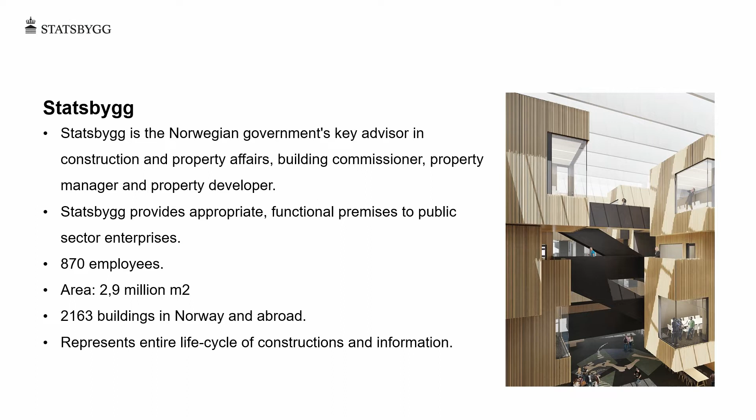Statsbygg is a governmental body. We are quite a large organization with above 800 people, and we are managing more than 2,000 buildings. We provide workspaces for other governmental bodies, especially buildings that are not usually available in the commercial market, unlike office spaces. So it's police stations, opera buildings, embassies, and so on. We are representing the entire life cycle, both of constructions and also the information about constructions, and that is, of course, the focus of my presentation here.

I myself, I'm an architect, but I've specialized in information management and digital information management. I'm the leader of Statsbygg's BIM group. I'm also project manager of what we call SIMBA, which is our BIM requirements and implementing those in projects and building operation. I'm also convener of a Norwegian standardization committee for the series of BIM standards. Recently, I've also been a task group leader in the CEN task group for developing guidance on how to bind BIM requirements to contracts according to ISO 19650. Earlier on, some years back, I was the managing director of buildingSMART Norway.

So the business case for using BIM for us, and I would like to start with showing you what a BIM is for those of you who may not be acquainted with the term. A BIM is an object model, it's a process using models like you're seeing on the screen, and those models consist of objects that are machine interpretable. Machines understand what they are, and you can also attach information like you see here, naming and properties to, for example, this wall that is highlighted with the green color here. So basically, we are modeling buildings before we build them and are able to do a lot of analysis and so forth.

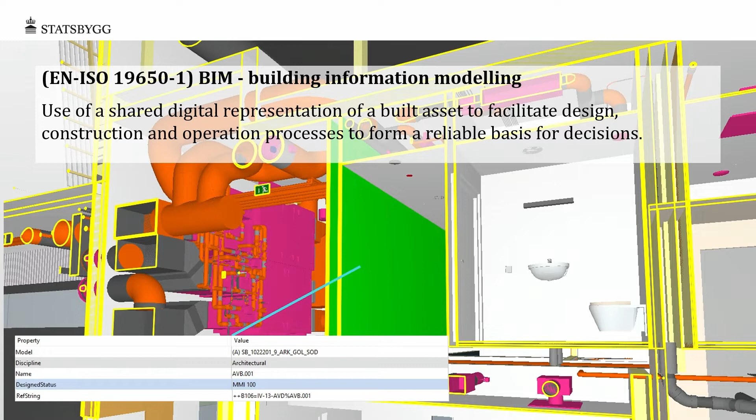Some of the gains that we see in our uses, and those are just four out of many examples, is that it improves the quality of the decision process. We, as a client organization, have a better overview of the consequences of our decisions. We're using it for example for estimating cost, life cycle assessment and calculation, calculating greenhouse gas emissions, and so on. So we can do it on a pretty precise level.

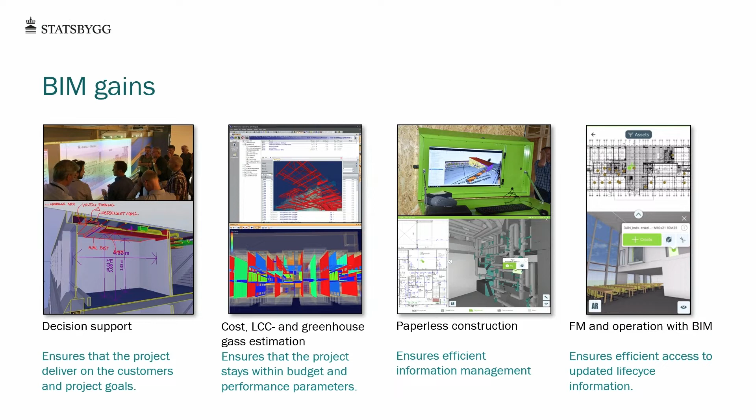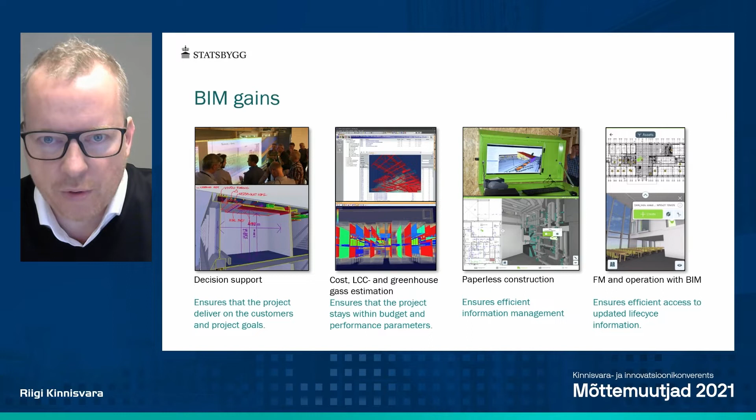And the strength about using models is that, for example, quantities and control of types and object systems is managed very well. It also gives us a benefit to make it possible to streamline information management to, for example, the construction site. So the construction site always has updated information, and they have a better understanding of what they are about to do and build. And of course, we have plans, and actually we are implementing systems now to use BIM also in building operation and facility management as well.

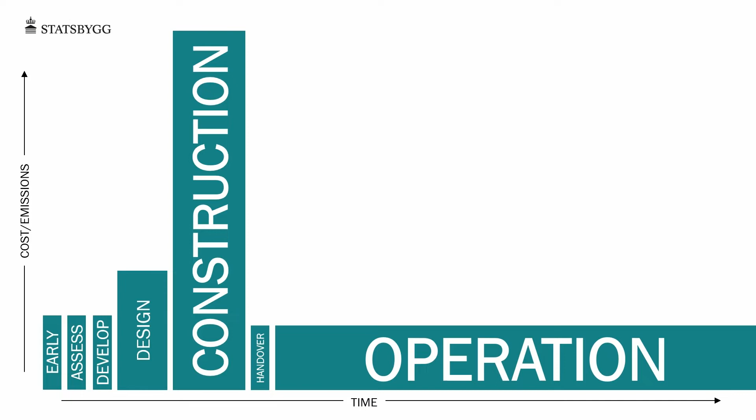And in order to achieve those benefits, we need to digitize those processes that have the highest turnover of cost and emissions, and those are construction and operation. We have been using and requiring BIM for quite some years in Statsbygg, but it's very much focused on design. That's quite natural because it is in the design stage that you are creating the information that you are using in the construction and operation. But now we need to move that information into the construction. A lot of contractors have actually done a lot of work here and are starting to be very digital, but we as a client have to make sure that information is much more standardized.

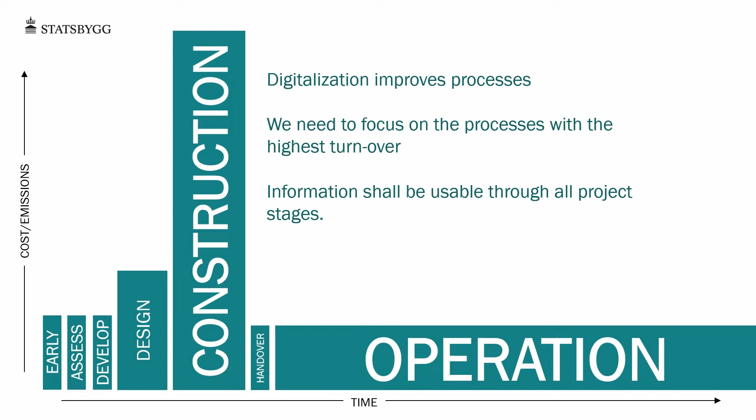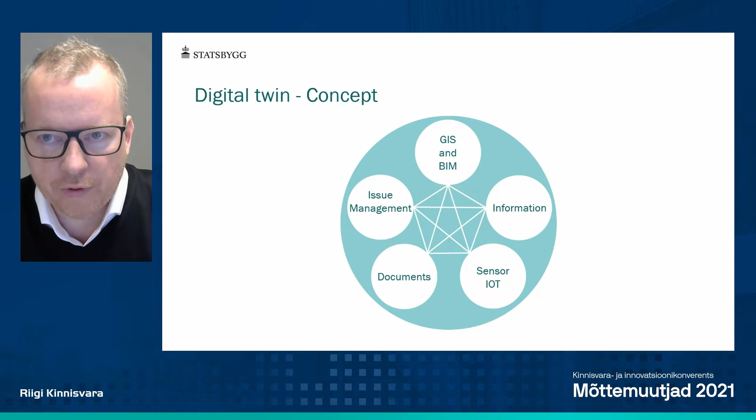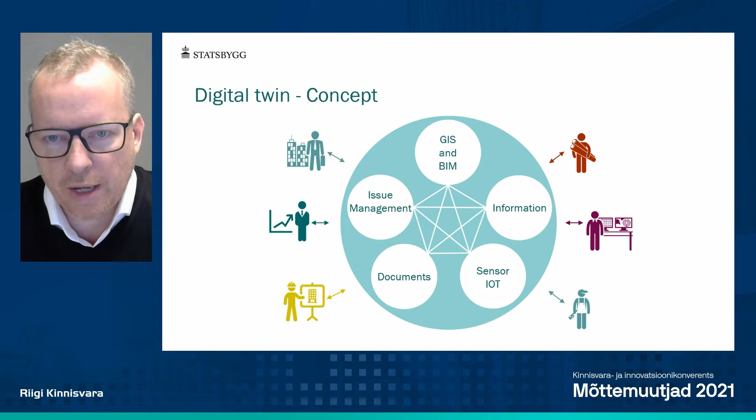So information from design and construction can be used in a standardized way during operation, because we need to be able to operate our constructions across all projects, so it has a uniform information structure. That is especially important when you look at the concept of the digital twin. You're probably familiar with that term, and in our approach to the digital twin concept for building operation, it means that people operating and facilitating the constructions have to be able to utilize information such as BIM, but without being BIM experts. They have to be able to reach out and get the information they need from their own applications. So we need to link a lot of applications together, and in order to do that, we need to be standardized.

We have also had some reports pointing in that direction. Those are actually quite conservative estimates, that we have the potential to save 7.5 million annually just in Statsbygg on building operation, through to increased innovation, improved quality, and also cost efficiency by being more digital. So those are the business cases and why we're doing this.

So we have some strategic goals that we are going to achieve in the future. Now, a little bit about SIMBA, what we call a solution to our challenges. And what are our challenges? When we look back from when we started to require modeling in all our projects in 2011, until what we have received in 2018, we saw that actually only a third of all the projects that were required to deliver models delivered something, one model or more.

And it was actually just less than 10% who had delivered all models for our archiving and use in building operation from all the 4 domains that we required. And none of them were according to our information standards. So this is a problem for us. We cannot really use all those models in building operation without a lot of alteration and checking and clearing. And it's a lot of cost.

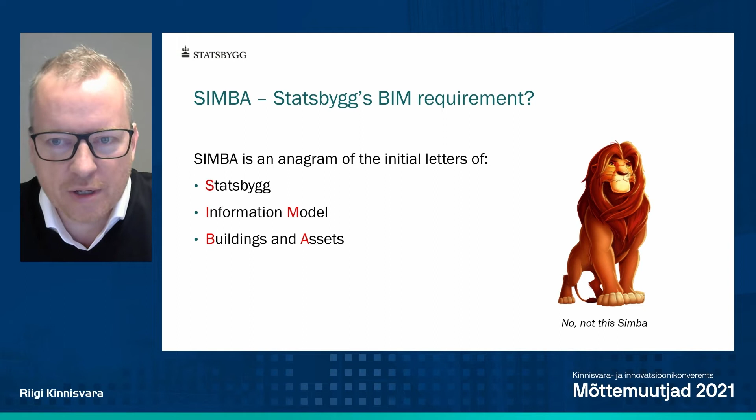And that is actually what SIMBA is, and SIMBA is not the fellow on the right. It's not a Disney character in this case. It's an acronym of Statsbygg information modeling, building and asset. And SIMBA is, most of all, an information standard. That means that information shall be able to be used across all project stages and all projects. And it should create predictability in the industry, so whoever is providing information for us knows what is expected from them.

Then it's also a standardized BIM requirement set based on the information standard. And since it's standardized between the projects, it means that we also have central learning in the organization based on the experiences of how it has worked in the projects. Then it's the automatic model checking. I'm going to show you a brief example of that.

And then, of course, and I'm going to speak about that at the end of the presentation, it's all based on open standards. It's very important for us that we have a robust solution that will stand over time. So we try to be as harmonized as possible with other Norwegian and also international clients and owners, and all based on open standards that we have an impact on ourselves.

So a little bit about how the SIMBA tools can improve information quality. This is about the process, so you understand how we're working with SIMBA in a project. We have the SIMBA Statsbygg requirements in a database. And when we establish a project, we make a copy of that database. The database is provided by a German company called AEC3, and then it will be project specific. And you can export a report that is human readable in PDF.

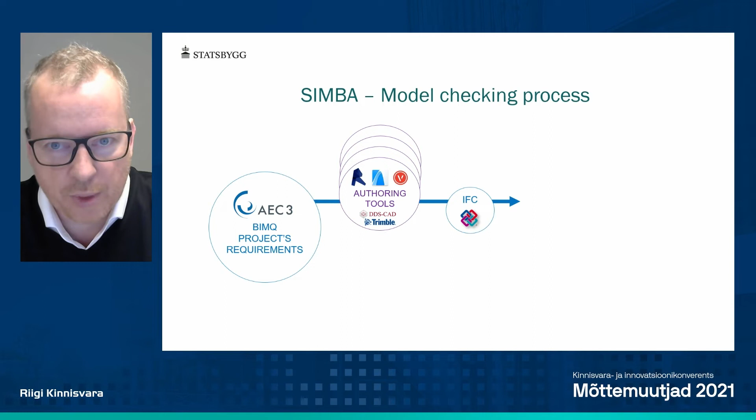So the architects and engineers know what is required from them, and can develop their models and their design in their proprietary software and export an IFC file. And what is special about this requirement database is it also exports something we call an MVD XML file, which is in the buildingSMART family of standards. The normal user doesn't really have to think about all these formats. It's just a file type that describes the requirement.

And then we have, together with DataCubist in Finland, developed a user interface in SimpleBIM, and likewise with a Norwegian company called NTI, a solution called Pillr, where we have developed an MVD XML interface. You can read the IFC file and check it according to the MVD XML requirements. And all deviations that are found can be reported back using the open standard BIM Collaboration Format directly into the authoring tools of the architects and engineers.

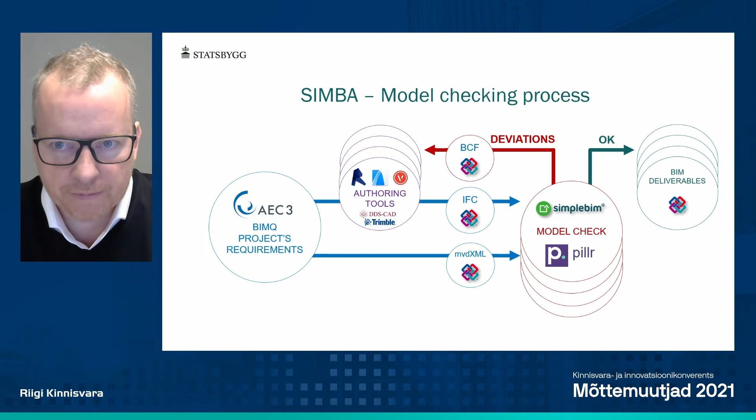And with a bit of training, the point is that the architects and engineers should run this process by themselves. So we as a client should just receive accepted and correct BIM deliverables. And this is just an example of how it is done. You start with loading in your IFC file, then you open the MVD XML plugin.

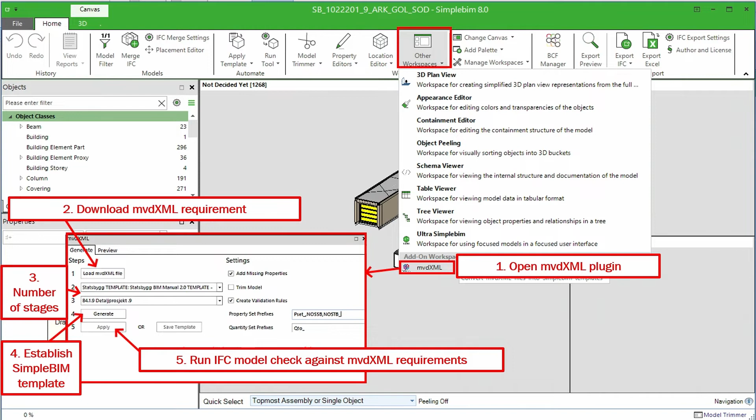It's available for everyone who has a SimpleBIM license. There's a bit of setup where you download the right MVD XML requirement. If you have more than one stage in the requirement, you say which one it is, and then you just run the requirement, and you get an overview of all the deviations, and also everything that is correct. The upper is the overview on object classes, and the lower is a more detailed report on property level. So it can really give very good insight.

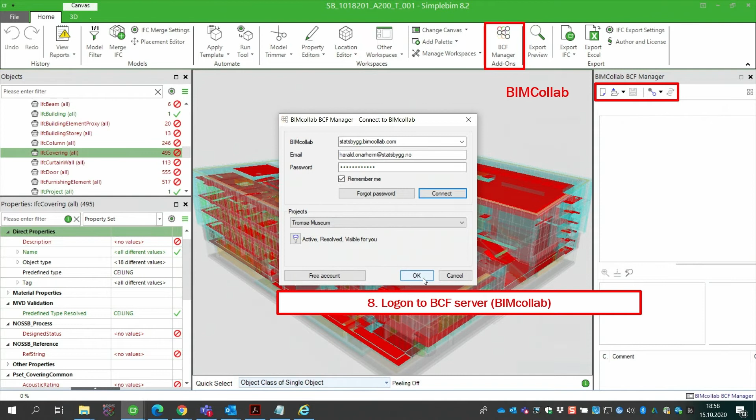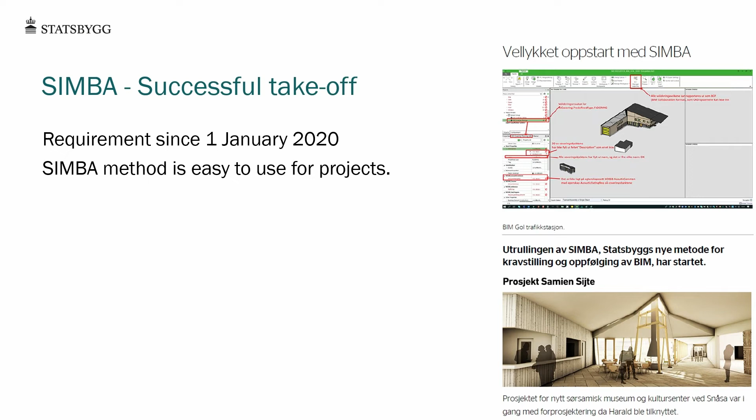And it's possible to just log into your, in this case, BIMcollab, and just export the report as it is, or make edits in the BCF report directly to the architects and engineers. So this is actually quite a good workflow that we have trained our architects and engineers in our projects. And since we started using this on January 1st, it's been quite successful. So it seemed easier to use for many.

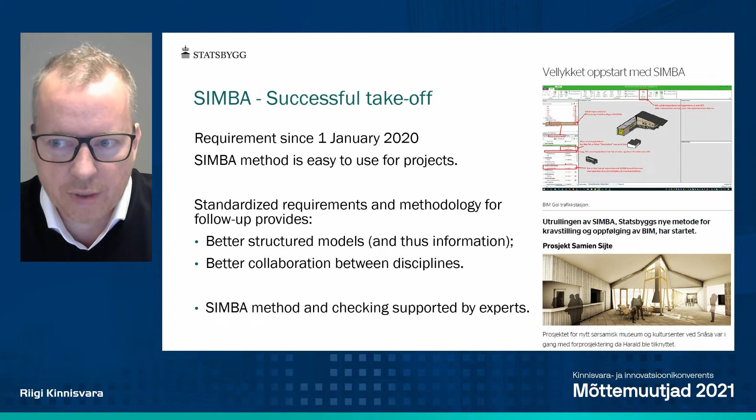And we see from many projects that the standardized requirement and methodology for following up and checking gives better structured models, which again also improves the quality of the collaboration between the disciplines in the projects. So we have some experts helping the projects doing this, but actually the projects in many cases are capable of doing this by themselves.

However, having said that, even though we have SIMBA, we still struggle with varying levels of information quality. Either information is directly missing, or it's still not according to our information standards. So it's not really because they don't know what to do or they don't know what the requirements are, but there are some main reasons.

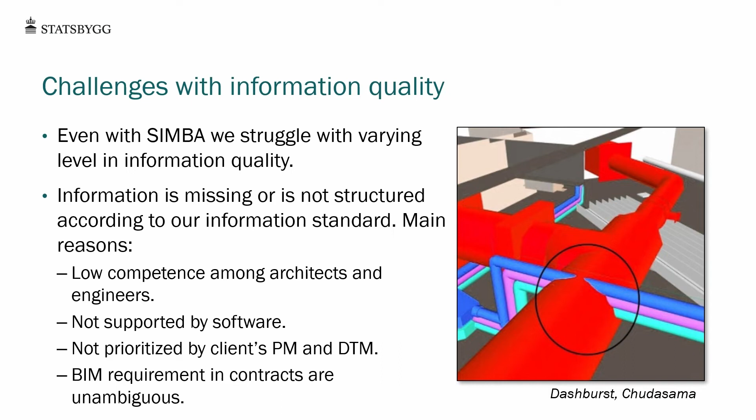And some of them are due to there still being, among some companies, relatively low competence among architects and engineers in how to work with information in a standardized structure. They are still very skilled architects and engineers, but this way of working is new to them. So this will still need some training in the industry to get to the right level.

We also see some struggle with some software that does not support, especially IFC exports, very well. And we have a very good dialogue with the local providers of software. We're trying to make them support our requirements, but this will take time.

Then we also see that actually the project managers and design team managers from Statsbygg do not always prioritize BIM requirements among the many other tasks that the project should do. And that is simply because there are so many requirements on environmental requirements, operational requirements, health and safety issues, and so on. More and more requirements shall be delivered by the projects, and the budgets for the building projects are not going up. So they need to prioritize as well.

So the next step for us will be to make the project managers and design team managers start using BIM themselves, improving their capabilities as decision makers. So they will start to look at BIM not just as a risk and an extra cost, but actually as an asset.

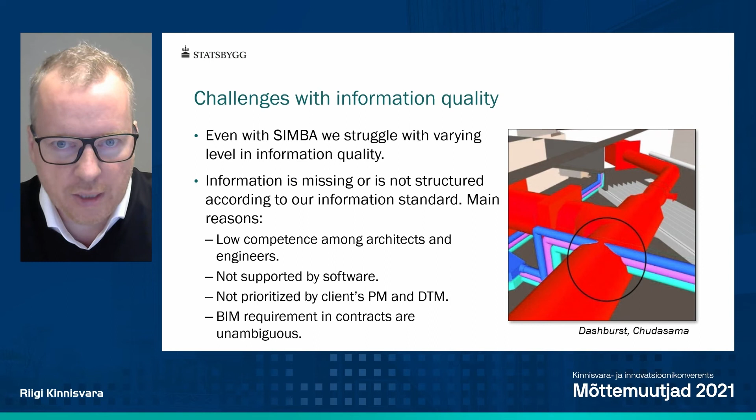And one of the other reasons is that, yes, we have a very good and unambiguous description of what we are requiring, but how they are bound to the contract may not be very good. We actually, until recently, did not have a very good methodology to bind the SIMBA requirement or the BIM requirement to our contract. So what we see is that requirements have to be specific in the contract. They have to be understood and agreed by all the project's actors.

So that's why we recently started procuring and implemented ISO 19650 Part 2 based on the guidance from the technical report CEN 17654. And it's relatively easy. Usually the BIM requirement was actually something you started detailing after the appointment with an architect, engineer, design group, or turnkey contractor was made. Now it's actually going to be part of the tendering process.

So what we've done here is simply that we have made some guidance on how to use these 3 templates, and then we made a template, and one of them is for our project managers to fill out. Most of it is actually filled out because SIMBA is a standard, so we've done it for them, so they just have to go over it and look at it, if it looks good, that it describes our requirements on an overall level.

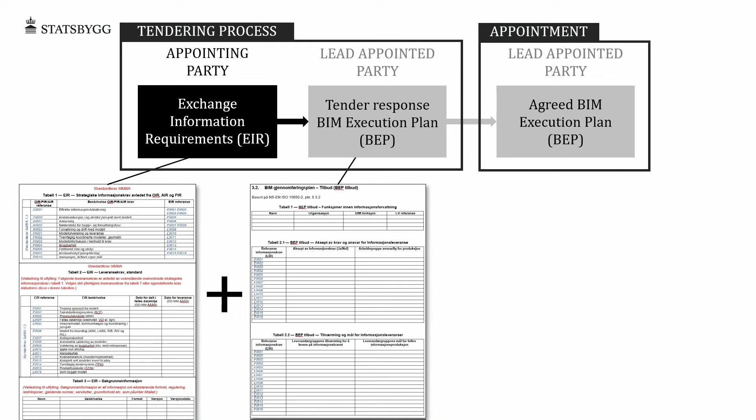And then we send them to the potential, what we call, lead appointed parties, those who are responsible for the potential contract, and they just have to fill in who is going to deliver, and are they going to deliver on our requirements? And if not, we want to know it and maybe even have them explain it.

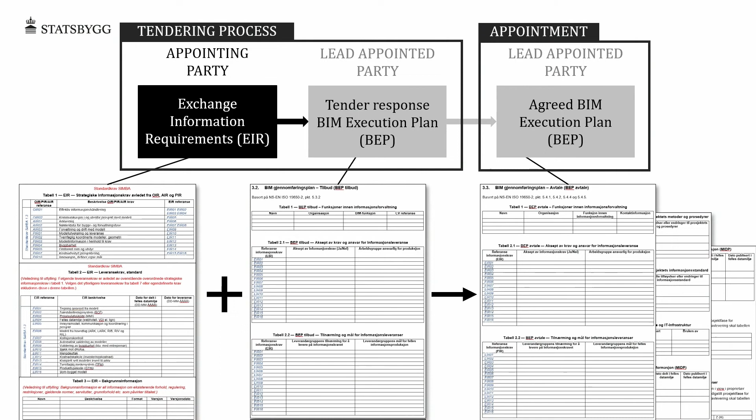And then we find who is going to be our appointed parties, the architect, engineer, which group is going to work for us. We agree on the BIM execution plan based on the tender response, and also add some more information about model details like common origo, story heights, and so on. So I think this will help us make the contracts binding with the SIMBA requirement on a contractual and agreement level.

So this is relatively new for us. We had to go through a lot of documents. The upper box, the Statsbygg information requirement documents, we had to go through all of them, and many of them said something about BIM because we've been requiring BIM for some years. And now they all have a standard text, all referring to the BIM requirement document, box number 2.

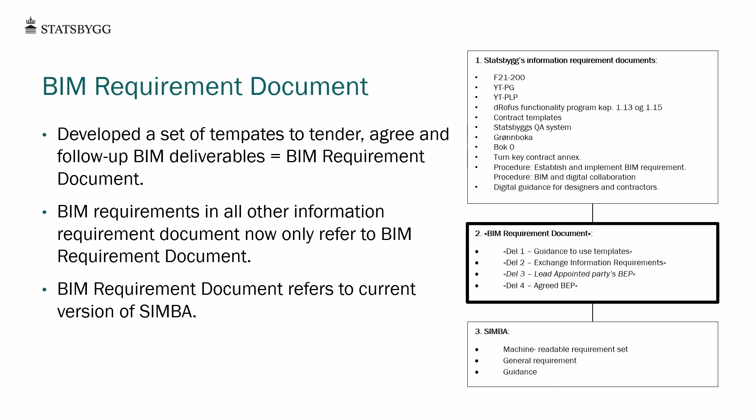Which are the guidance and those 3 templates I just showed you, all pointing again to the specific requirements in SIMBA. As I said, it's quite new to us, so we don't really know what to expect from this. We're developing our experience based on it, but so far it looks relatively good.

Finally, I'm going to give you a bit of information on how we have come so far and how we are working also in the future. We are collaborating broadly with the industry, with other clients and owners, but also architects, engineers and contractors, and of course with standardization. And in order to do that, standards and open formats are key.

So we're just going through a few slides about why we are so dedicated and committed to open standards. We believe in free competition, and we will not favor any consultants, architects, engineers based on their software. It also goes with which kind of software we are using in projects. We are quite agnostic to what kind of software you're using, as long as it can deliver on open formats such as IFC for buildings.

Many of those smaller companies, they're not so small anymore, actually. Many of the software companies that you see examples of here, they all started based on IFC. And many of them do have some plugins for specific software today, but I would say that they wouldn't be in the position they are today if it were not for their services and focus on open standards. And we very much appreciate that.

When we have open formats such as IFC, it makes it possible for us to express our requirements in just one format. We don't have to be experts on all kinds of different proprietary formats, and we don't have to provide specific guidance on how they're doing that. That's up to the architects, engineers, and contractors. If they choose a tool, it's up to them to make it work and deliver on our requirements. And since we just have one expression of our requirements, it's much easier for us also to collaborate and harmonize our requirements with other clients and owners.

And you have some examples here. Two other very large governmental bodies, the Norwegian Railway client and owner. They have more than railway. They also have a lot of buildings, station buildings, for example. And then the hospital builder, which is the large client for hospitals in all of Norway. Those are very close collaborations with us about information standards, and we try to agree upon most other things.

And then we recently established a user group in buildingSMART Norway, including many more clients and owners. So we try to broaden the collaboration with many others, both public, municipalities, and also private clients and owners. That's very interesting for us.

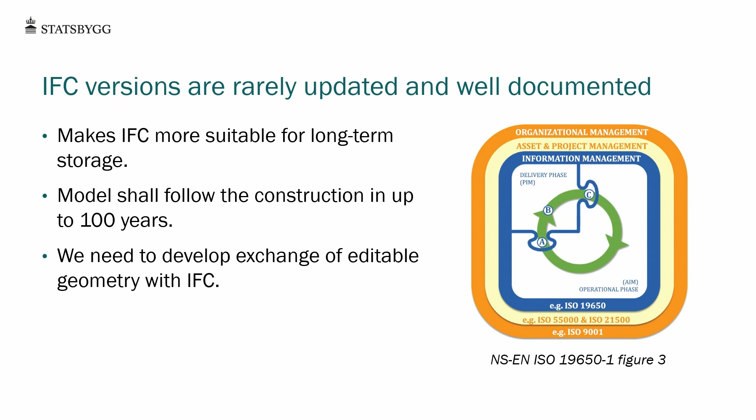One of the positive things about the IFC format, you may not be acquainted with that, but the IFC format is not updated every year as many proprietary softwares are. The last version was established in like 2010, and is just being replaced now by the next version, IFC 4. And that actually makes it very suitable as a long-term storage format. We have to be able to use and maintain the information about buildings for the next 50 to 100 years. And it's a lot of struggle if we have to update all proprietary softwares every year. So it's much easier to maybe just update it every 5 or 10 years.

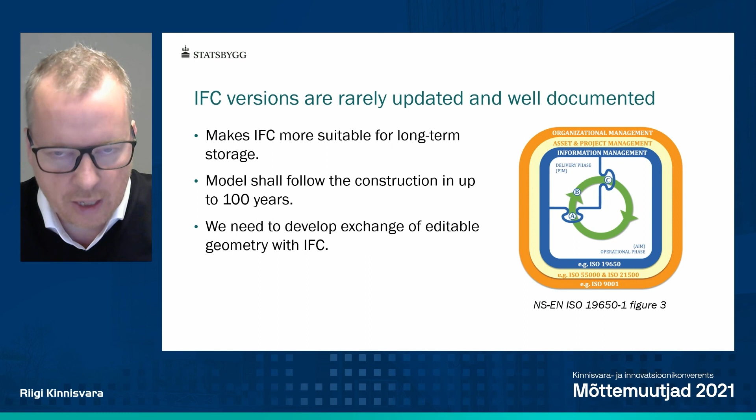That being said, IFC still does not have the ability that you can take an IFC file and make some changes in geometry. So we still need the proprietary formats. And that is the development we need to look into and contribute to in buildingSMART to make sure that IFC actually can stand alone as a storage format.

And also the buildingSMART community and standardization community and OGC for the GIS standards. They are transparent communities. They are democratic. We can participate in them and bring in input from our needs. And that is one of the reasons why we have committed ourselves to support buildingSMART both in Norway and internationally.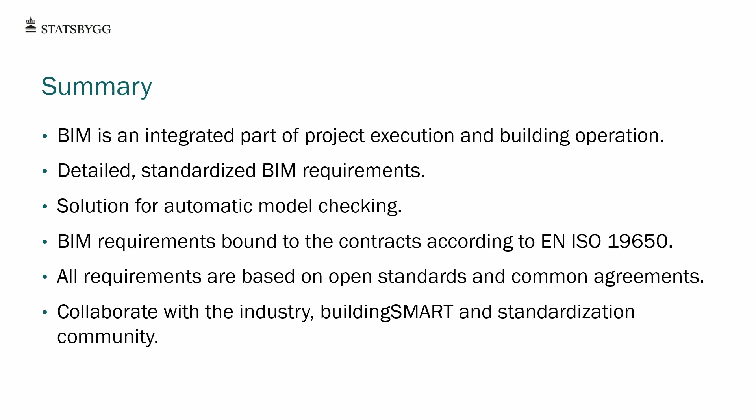So a brief summary: BIM is an integrated part of the project execution and building operation in Statsbygg. In Statsbygg, we have developed detailed standardized BIM requirements that are important for us, so architects, engineers, and contractors know what to deliver to us. We have also developed a solution for automatic model checking that shall make sure that we actually are getting the information that we need and require.

And we have now also developed a methodology, based on an international standard, to bind the BIM requirements to the contracts. All our requirements are, as I said, based on open standards and common agreements, so they are robust and can stand over time. And we are committed to develop all this in collaboration with the industry, the buildingSMART community and the standardization community.